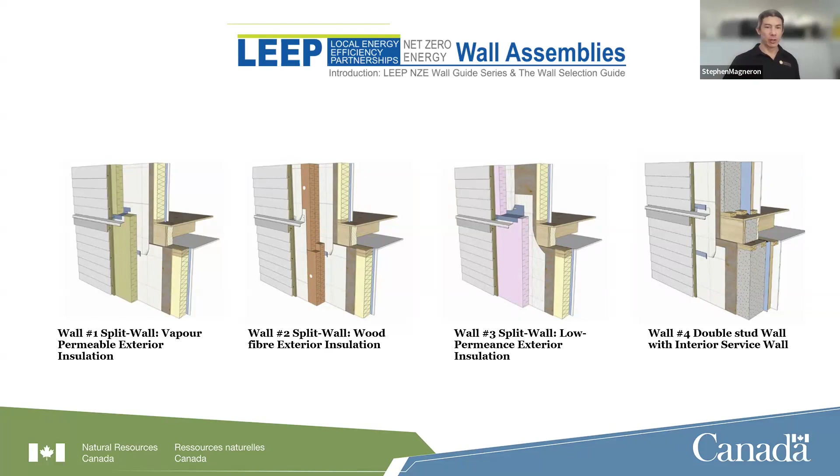So coming up with details that will limit that risk is what the wall guides are all about. The Larsen Truss is one option that will be discussed in this particular case study.

The original Larsen Truss was developed by John Larsen in Edmonton, Alberta. It was in the 80s, and he developed it as a way to combat the increased labor or technical side of things with respect to double stud wall. I believe the story he told Martin Holladay from Green Building Advisor when interviewed was that there was a project in Jasper, and the framers were struggling in this remote area to do the double stud wall.

So he came up with this method of getting the framers to essentially build the house like they normally would, nice and simple. And then he would come in as a subtrade to add the poly as the vapor barrier and air barrier, and then add insulation using this method of ripping down a 2x4 to create basically 2x2s, and then creating this outrigger or ladder on the exterior of the wall to add insulation, then sheathing, then siding. It was a very effective way of creating a great air barrier and also adding a meaningful amount of insulation to the outside. You can see the image there.

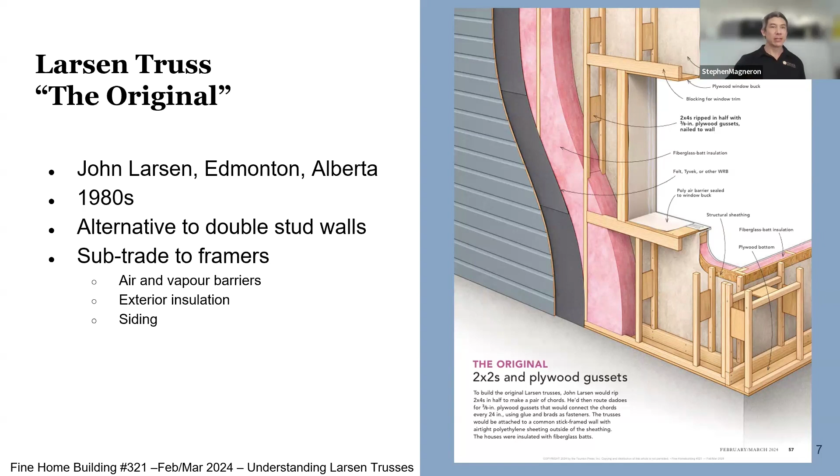That's from a Fine Home Building magazine issue discussing the original Larsen Truss. Since then, Fine Home Building, Green Home Building Advisors, and a lot of publications have covered the Larsen Truss. Here's another one from 2009, where the key point is that an effective R value of 40 can be achieved, which, if you're familiar with Dr. Joe Lstiburek's from Building Science Corporation's perfect wall and typical R values, R40 is appropriate for most climates, and certainly in a cold climate. So achieving that with the Larsen Truss is easy, both in new construction and for retrofits.

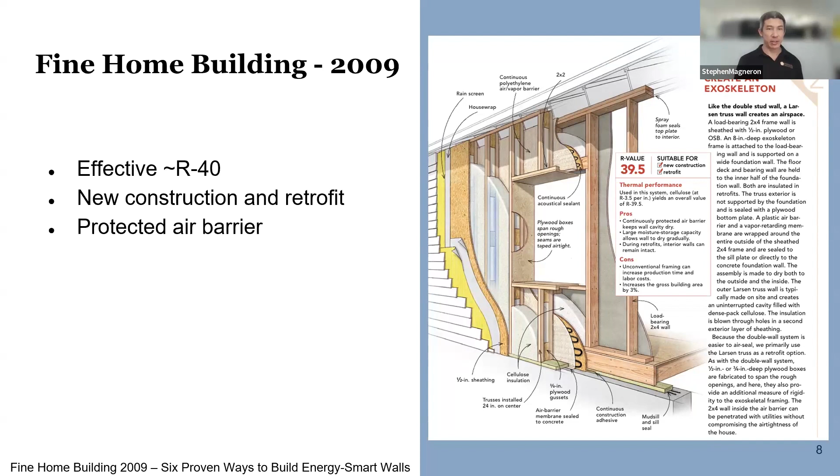The beauty with this is that the air barrier is protected when it's in the middle of the wall. Another check: the interior walls in a retrofit can remain untouched, and we'll see that in one of the case studies. There could be high labor costs, but that needs to be weighed with any strategy. And there could be increases in the gross building area lot line.

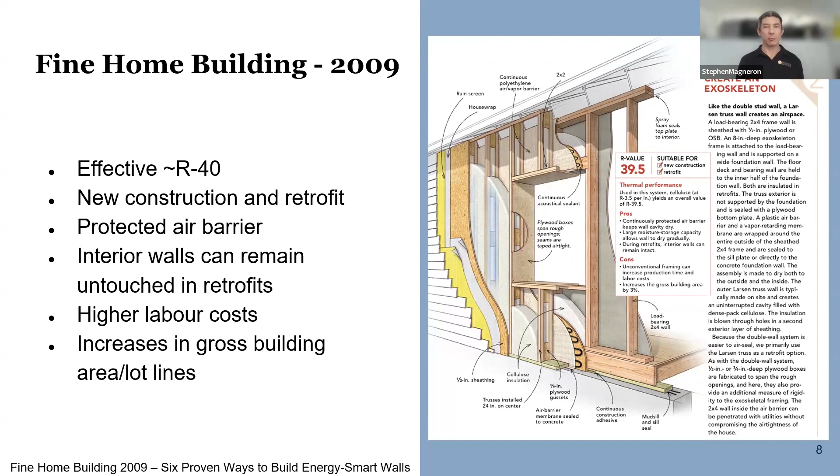So this was a great strategy, and this particular article was '6 Proven Ways to Build Energy-Smart Walls.' The Larsen Truss got featured in that.

In 2013, the Cold Climate Housing Research in Alaska also conducted studies on the use of Larsen trusses for both new construction and renovations. This research paper confirmed that superinsulated, vapor permeable, or vapor open wall design is appropriate for a cold climate.

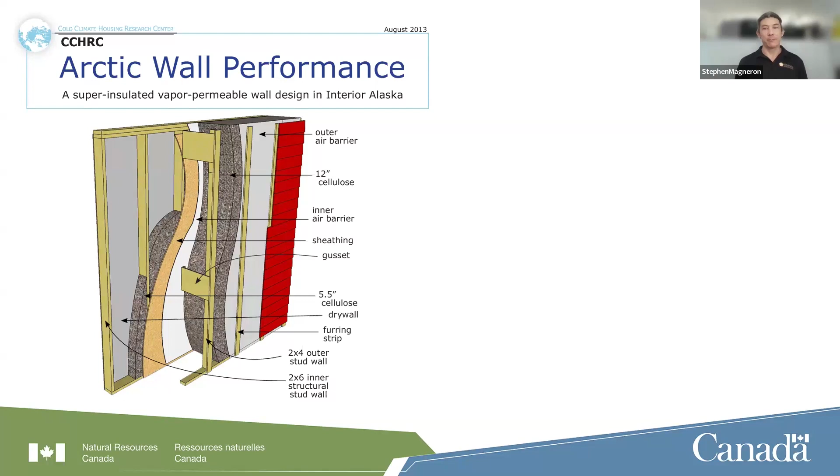The key attributes they found were the great air tightness of this particular project, made easier to achieve when the primary air barrier was located in the middle of the assembly, protected from both the elements and the occupants. The load-bearing structural wall then becomes essentially a service cavity with no vapor retarder on the inside or special consideration with respect to air tightness. This made it easier for the subtrades involved to not have to think about air tightness unless something actually goes through that primary air barrier layer.

They also determined that a class 1 vapor retarder is not necessary in an assembly detail like this, because the vapor permeability provides greater drying potential for the wall throughout the year, since there's drying potential on both sides.

Super interesting: the use of cellulose in this particular study also made the wall safer, because cellulose is able to store moisture and buffer it, so that if moisture gets in, it's able to redistribute. And because there's great drying potential, there's no risk of moisture damage or a big accumulation of moisture or the development of mold.

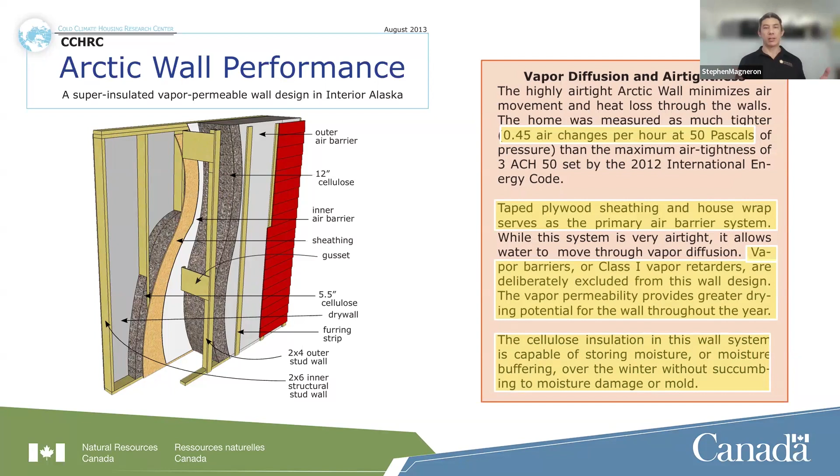Interestingly, the NRCan 'Keeping the Heat In' publication, which was first released in 2004 and is currently available online—these screenshots are from the online version—in section 7, insulating walls, insulating, renovating, and building additions.

So this is more for homeowners or renovators who want to improve their buildings, add insulation, and make homes more airtight. We see that a Larsen Truss is highlighted as an alternative method of doing this deep energy retrofit. It's a technique not only for renovators, but also DIYers.

And the publication also has really great points to think about, like adding significant amounts of insulation. The insulation only ends up being about 15 to 20% of the total cost. The rest is additional materials and labor.

You have to think about details like window and door bucks and other penetrations for services. Extend past the walls to cover the headers—so instead of just attaching to the walls itself, you extend above and below so that you cover those headers, which are sticking points for air tightness, adding a good amount of insulation in most cases, and the ability to install a new air barrier.

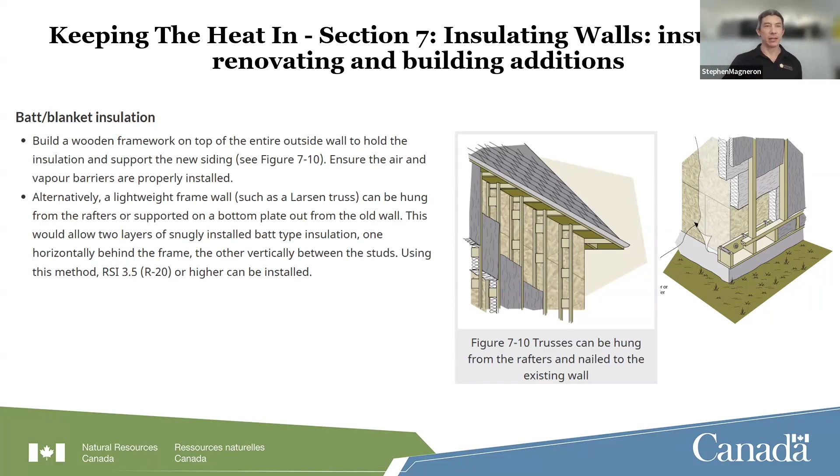Speaking of modified Larsen Truss, Fine Home Building came up with a more recent article understanding Larsen Trusses and the different styles of methods of essentially doing a Larsen Truss, but in a different way. So that's what we're calling the modified Larsen Truss.

Here's one of them, a very popular one using I-joists to simplify the construction of the Larsen Truss, by leveraging a product that can achieve the same goal of adding a thick layer of insulation to the exterior of the building. The I-joists come in certain depths to make it easier—whether it's 9-inch, 12-inch, 14, 16-inch, whatever depth you need, it comes already pre-cut, pre-assembled, basically.

So it's leveraging that idea. Those in the passive house world have already done thermal analysis to suggest that the OSB web of an I-joist doesn't represent much of a thermal bridge at all. It's not like a wood stud that goes all the way through, 1.5 inches wide. The minimal thermal bridging from that OSB doesn't really factor in, so we can almost say the Larsen Truss is a continuous amount of insulation.

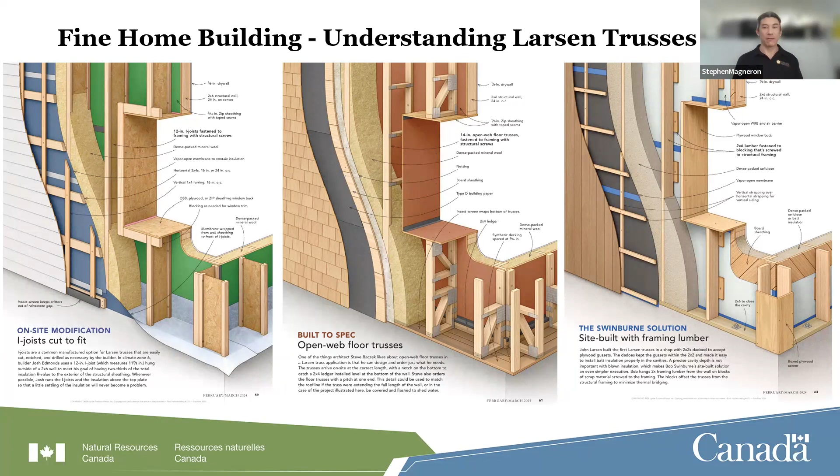And then we have, in this particular article, what they call the Swinburne solution. It's an example of a site-built option that essentially represents any other method to achieve the same Larsen Truss characteristics, and it can differ greatly depending on the specifics of the project.

But I want you to remember that the Larsen Truss is only one part of the deep energy retrofit. It's dealing with the above grade walls and headers. One must also consider all the other components of the thermal enclosure with respect to a deep energy retrofit - the below grade walls and slab, the roof, windows, air barrier, ventilation - all that needs to be taken care of.

I really like this image from River Architects. They hand drew this to show the cross section of their retrofit, pointing out the Larsen Truss. As you see, it's only one part of the big picture of that particular project in Cold Spring, New York, which is now their office, actually.

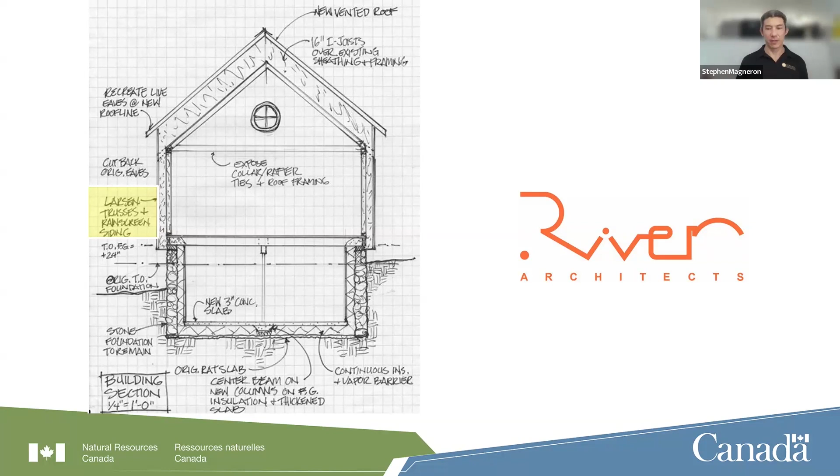So that's a quick history on the Larsen Truss and how we've moved from the 80s to now with different methods of achieving essentially the same goal.

And so we start with the first case study. This is a project in Sainte-Agathe in Quebec, near Montreal. It started its life as a barn. We aren't sure when it was originally built, but the walls above grade used a construction method called pièce sur pièce, which is post and plank, very common in Quebec from the late 18th century up till the early 20th century. This method usually included a 6x6 square post spaced around 4 to 6 feet apart with 3-inch thick pine or spruce boards as sheathing - very heavy duty, used a lot of local lumber, and very popular.

Even in Montreal, with Felipe at Retrofit Construction, we had a project where this method of construction was found in his own project as well.

Riverstone was assumed to have once clad this building, based on the extension of the rubble foundation of about 8 inches. The barn was converted in the 60s, around 1968 we reckon, with siding rather than stone. Who knows what happened - perhaps the stone was repurposed or had deteriorated, so siding was installed, as you can see in that picture of the pre-retrofit house. Interior insulation was also added with the 2x6 wall.

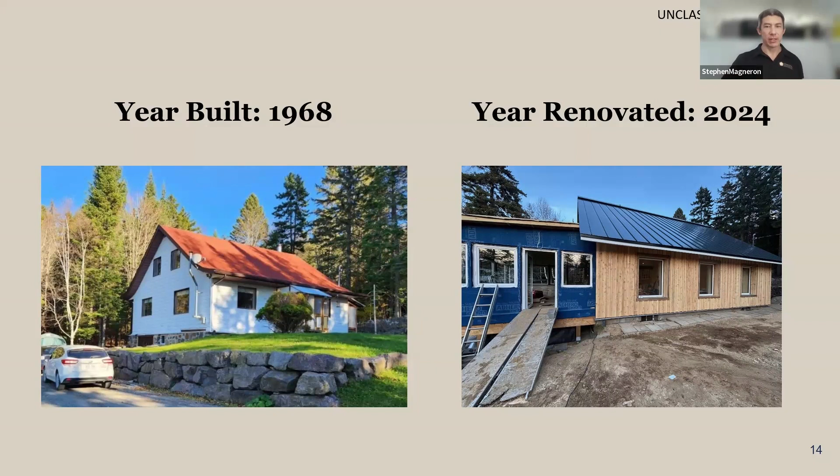So a perfect opportunity to set the project up for success. Here are the pre and post retrofit reports provided as part of the CHBA Net Zero Home Labeling Program. The rating of the house was originally 179 gigajoules per year, and the post-retrofit results reduced that down to 46 gigajoules per year.

The typical new house you can see there was originally at 89 gigajoules per year. That's the reference house, or a typical new house, with current code characteristics applied to it, whether it's insulation, windows, air tightness, all those things. So it's 89 gigajoules per year.

You can see there's a slight difference in the typical new house between the pre and post retrofit. That's really because of the chainsaw retrofit approach, where the volume got a little bit bigger and slightly increased surface area, because now the attics are conditioned space with the chainsaw retrofit happening. So the increased volume and surface area increased the energy consumption of the typical new house.

So chainsaw retrofit, just to describe that — actually, I think I'll be describing that in the next slide, so I'll hold on to that and keep you waiting with that description if you're not aware of it.

With respect to end use energy, when you get an EnerGuide rating label, it tells you the breakdown of where the energy is being used across major appliances or usage: space heating, space cooling, water heating, ventilation, lights and appliances, and other electrical. You can see in this particular case that space heating was 75% of the energy consumption pre-retrofit.

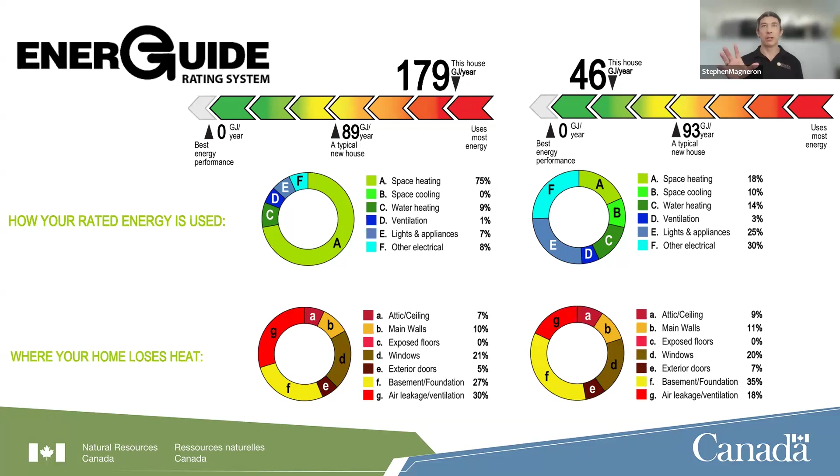When we look at the heat loss, another output of the EnerGuide rating system is an identification of where the heat is being lost from the thermal enclosure during the winter. It's broken up based on the location, and you can see here that air leakage is the highest amount of heat loss.

In the pre-retrofit, and then in the post-retrofit, it ends up being one of the smaller parts of it. We'll be discussing that throughout the course of this presentation.

But the ratios of heat loss between the pre and post are relatively the same, with the exception of air tightness, because everything was done to this house — the walls, the roof, the basement walls, the air tightness — everything was increased with respect to insulation. So the relative ratio dropped at about the same rate.

So here are some results, some key metrics from the outputs. We've got the pre-retrofit effective R-value of the walls, and we've got the total EnerGuide rating in gigajoules per year. If you're not familiar with that rating, a gigajoule is a unit of energy that is convertible from either kilowatt hours for electricity or cubic meters of natural gas or liters of propane.

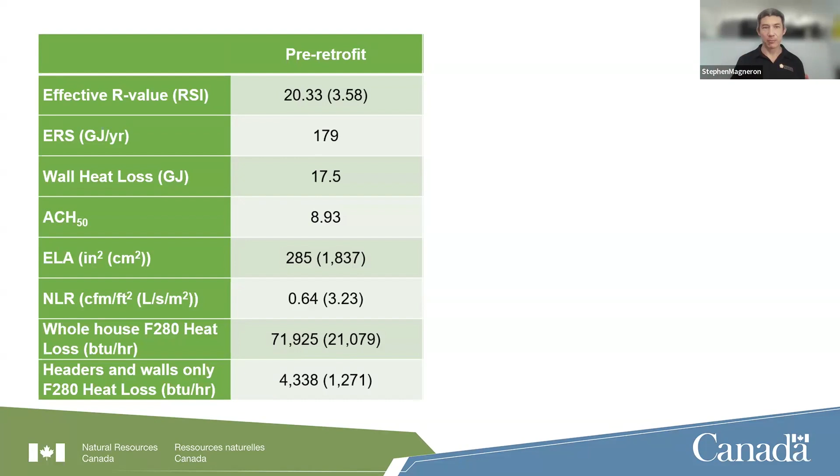So when we go to the post retrofit, now we see the improvements that have happened. We have increased the effective R value of the wall from R20 to almost R50. We're at R47-ish, which is a difference of 133%. Amazing. Then we've got reductions, reducing the total ERS gigajoule per year down to 46. The wall heat loss gets reduced by 73%.

The ACH, amazing result, 8.93 down to 0.74 at final. Huge improvements there. The ELA drops by 93% as well as the NLR. So huge reductions there. When we look at the whole house F280, we've gone from 72,000 BTUs to below 15,000 BTUs. And that heat loss is what we use to size the heating system. So instead of having a huge furnace, now we can really get by with a very minimally sized cold climate air source heat pump. So amazing reductions there.

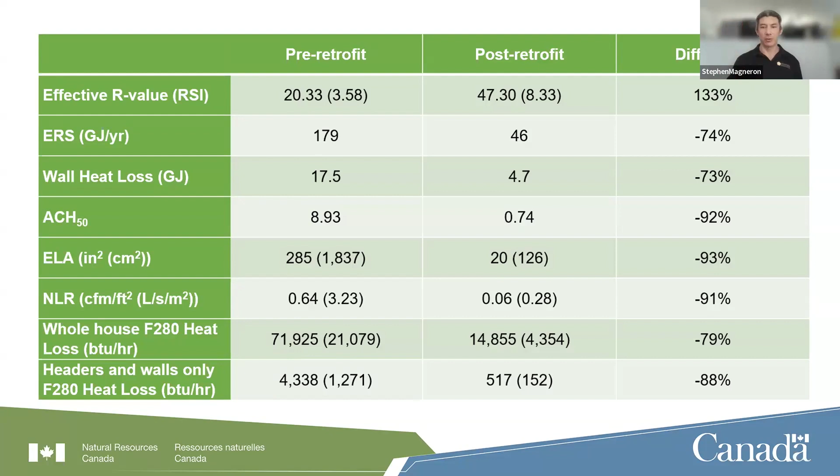And of that, the contribution to the F280 heat loss is also reduced significantly with respect to the headers and walls only. So that's a nice little snapshot summary of all the details and results from that.

The building is then wrapped with an airtight membrane, tested for air tightness, and then insulation is added to the exterior of the walls and the roof. The overhangs are reframed because we do want good overhangs for moisture deflection. New siding and roofing gets installed, and that's it. That's essentially the chainsaw retrofit.

If windows are to be reused, then it might be a good idea to uninstall the windows and then reinstall them and make sure that there's good flashing details at that time, so that we don't compromise the new Larsen Truss that is installed on the exterior, and we take the opportunity to make sure that the project will not be at risk of any moisture that gets into the wall system at all through windows that will eventually likely leak.

So it's a very effective way to achieve great air tightness and add a meaningful amount of insulation to the thermal enclosure. And so it's a great opportunity to use the Larsen Truss approach, although it's not the only approach that can be taken.

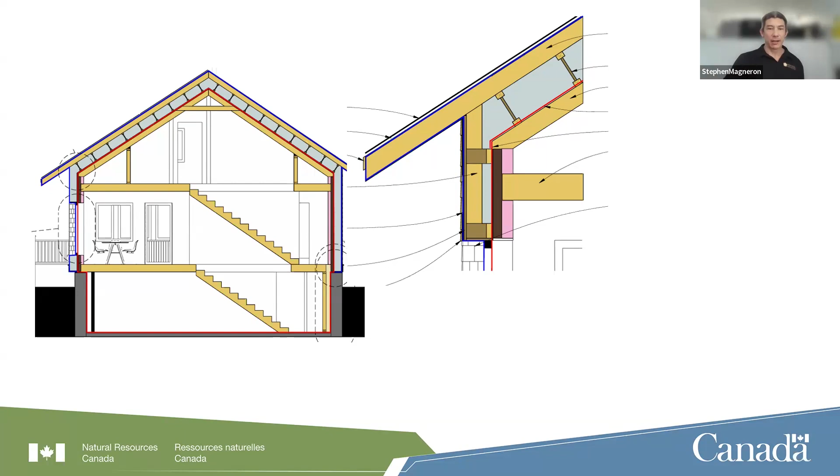Here is a detail of the wall to foundation that shows the depth of the original foundation that originally carried the riverstone cladding, but now bears the modified Larsen Truss. The top of the foundation needed some repairs, which made it the perfect substrate for the exterior 2x4 of the modified Larsen Truss. Instead of having the gussets cantilever out, there was no need, because that 2x4 was held in place by the foundation. Because of that, we developed the strategy of an 8-inch Larsen Truss, so there's a nice amount of continuous insulation and then the exterior 2x4. It's a great way of optimizing the solution based on the variations of the particular project.

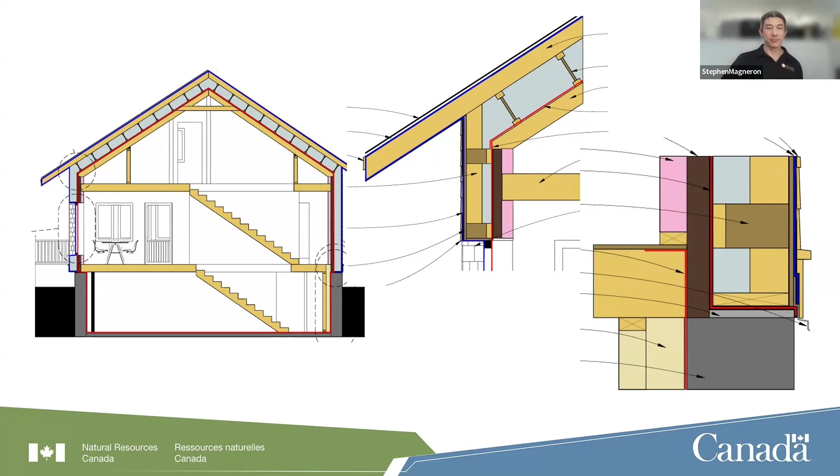Here's a great image showing the 3-inch solid wood planks of the pièce-sur-pièce, or post and plank wall, and the forming repair needed at the top of the original rubble foundation, as well as the development of the plywood bucks framed for the window. The plywood bucks were originally installed deeper than 8 inches in case of modifications afterward with respect to the Larsen Truss. Once the wall was installed, the bucks were trimmed to the right depth, which made it a simpler situation for this particular project.

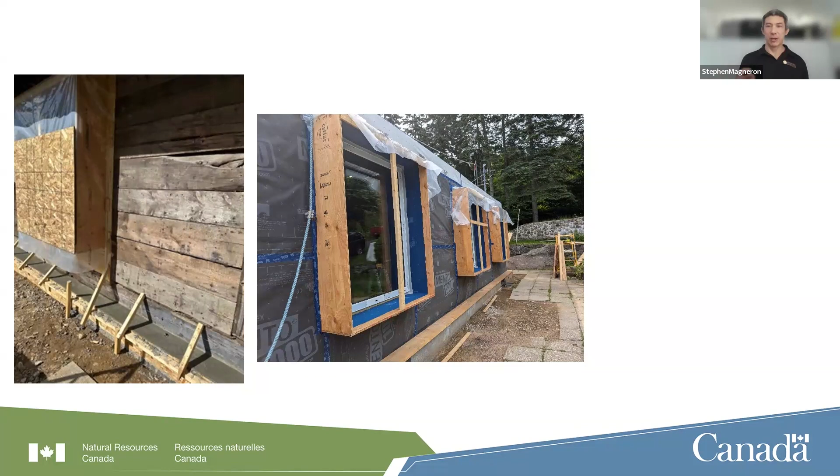It allowed the primary air barrier to be installed to the window bucks, and the interior of the window bucks to be properly flashed and addressed from a water and air tightness perspective. However, during our mid-construction air tightness test, because of that extension of the window bucks, we saw a little bit of air leakage happening in the corners, since the plywood bucks continued out and weren't trimmed. There was actually some discontinuity there, which was minimal in the grand scheme of things.

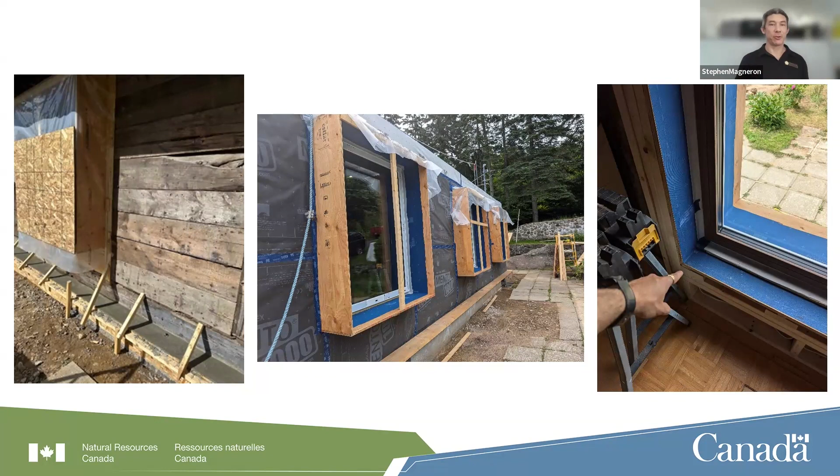Here is the primary air barrier once it was completed, and the only thing missing is a red ribbon on top, because you can see how neat and tidy it is. It's almost like a wrapped Christmas present, and in this case the windows and doors were also installed at that time, so scheduling was super important to make sure windows and doors were available early in the construction process, so that an early mid-construction air tightness test could be done as soon as the primary air barrier was complete.

Look how clean the wall to roof corner junction is when a chainsaw retrofit approach is taken. If you can imagine doing it all from the inside, that would be a really tricky area to approach. But with an exterior approach like this, chainsaw retrofit with Larsen Truss, that detail is really simplified and made much easier to achieve.

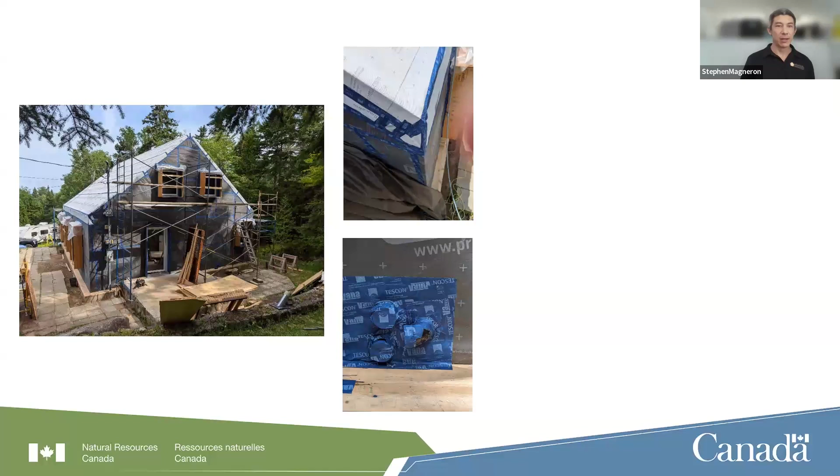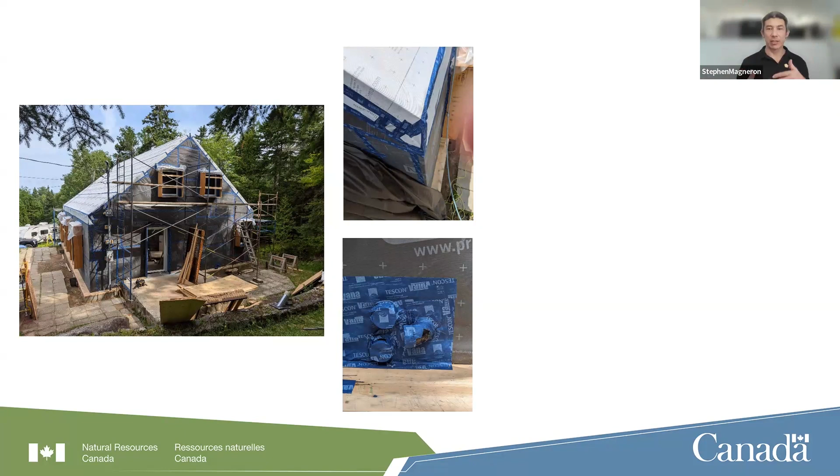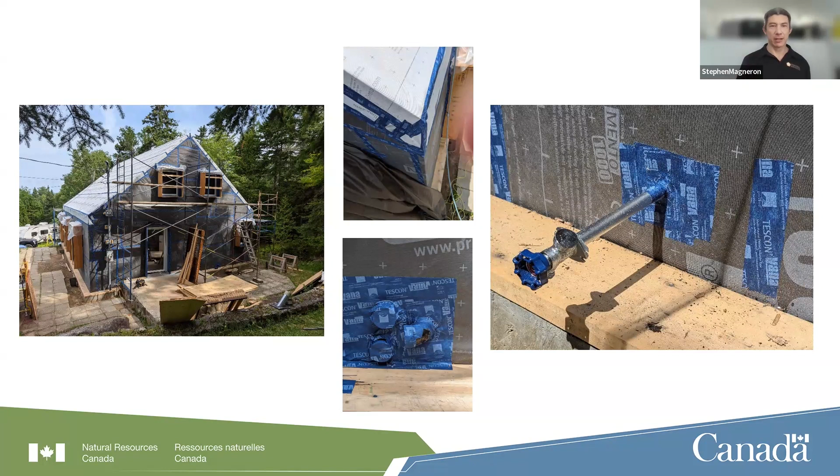As far as penetrations that go through the primary air barrier, the one hole for one penetration methodology is used, which really simplifies the process because the penetration is accessible from the outside. We don't have to work above our heads in header spaces that are tight, cramped, and not easy to access all the way around. With the exterior approach, it really makes it easy to get a nice seal in those locations. Even for hose bibs, roughing them in so they achieve the appropriate depth and are sealed appropriately makes for a great air seal.

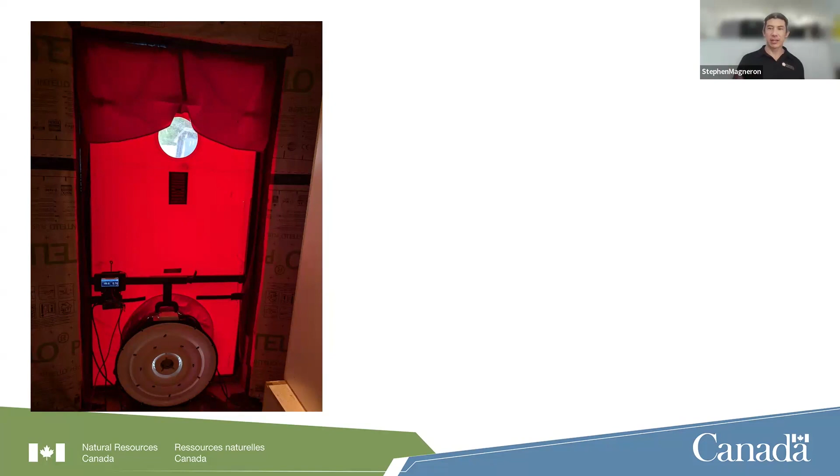So we don't have a red ribbon, but we do have the red door of truth, also known as the blower door. Remember, the pre-retrofit air tightness result was 8.93 ACH with an ELA of 285 square inches and 0.64 CFM. At the first mid-construction test, we achieved 0.73 ACH, which was an amazing result. This is mid-construction, first time out, knocked it out of the park.

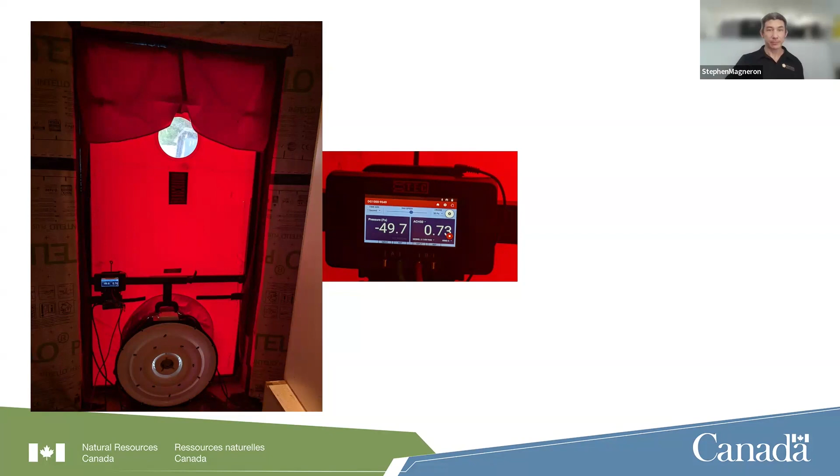We also attempted to do a pressurization test. For those of you aware of passive house, they do air tightness testing in both directions - depressurization, sucking air out of the house, and pressurization, to see what the results are there. But the test was quickly aborted when we realized the primary air barrier on the roof wasn't secured enough, and it was starting to balloon up, with some staples popping. So we aborted that and saved it for next time.

We did do a second mid-construction test once the Larsen Truss was installed, and the redundant secondary exterior air barrier, the WRB, was also installed. Those familiar with blower door testing might recognize the D-ring being used in this Minneapolis Model 3 fan, which means it's really tight - the smaller the hole of the fan used to do the air tightness test, the tighter it is.

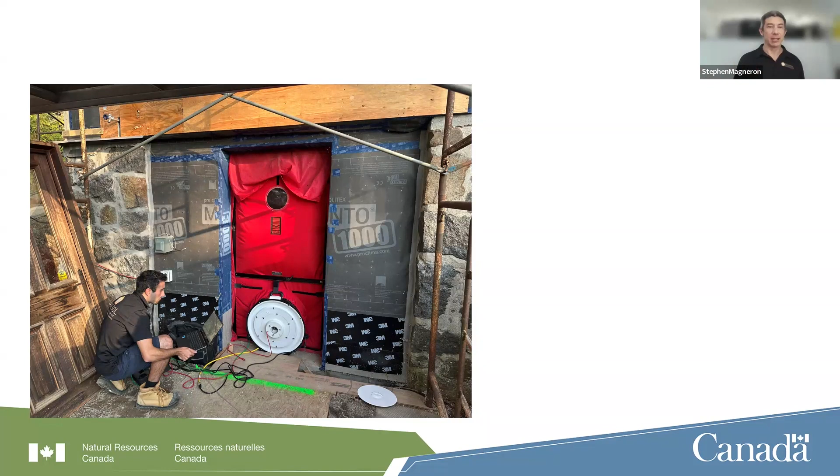Here are the results of the second mid-construction test, and we improved both, and were able to do both a depressurization and pressurization test. Interestingly, the pressurization test in this case was much better, and the average was 0.47 ACH.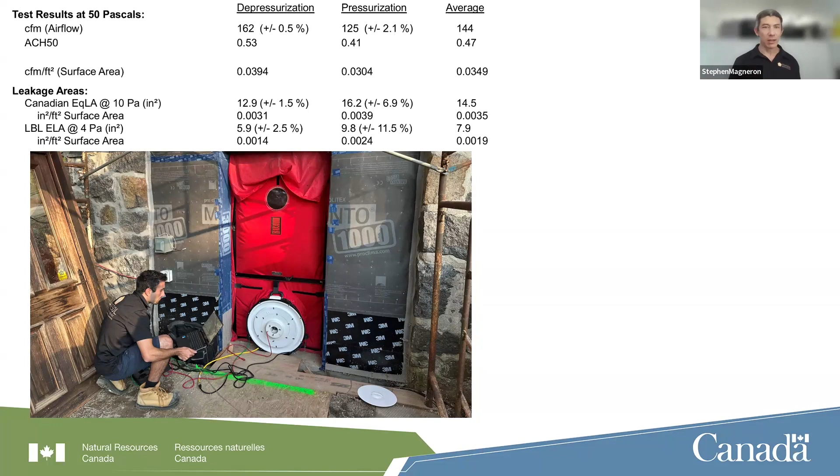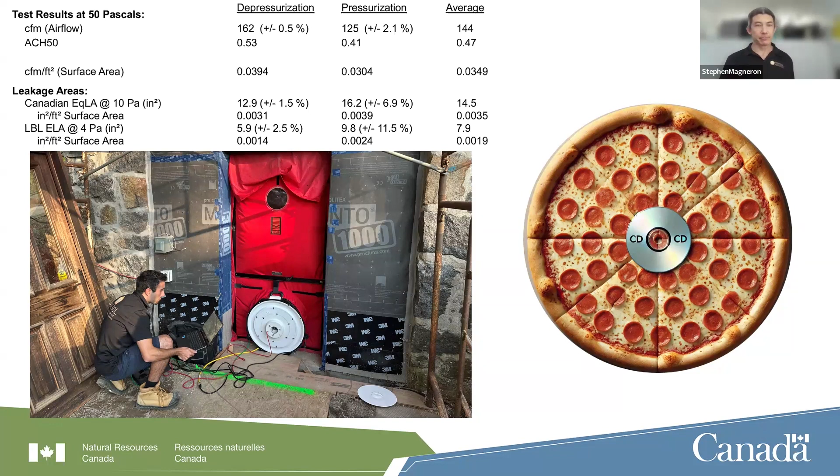But I'll point you to the EqLA, which reduced from even the 20 inches squared in the previous test down to 14.5 for the average of these two tests. But what does that mean? Essentially, the pre-retrofit hole was the size of a 19-inch diameter pizza, whereas post-retrofit, at this particular stage, it was the equivalent of a CD or DVD, for those who remember what those are. So a significant reduction in the hole.

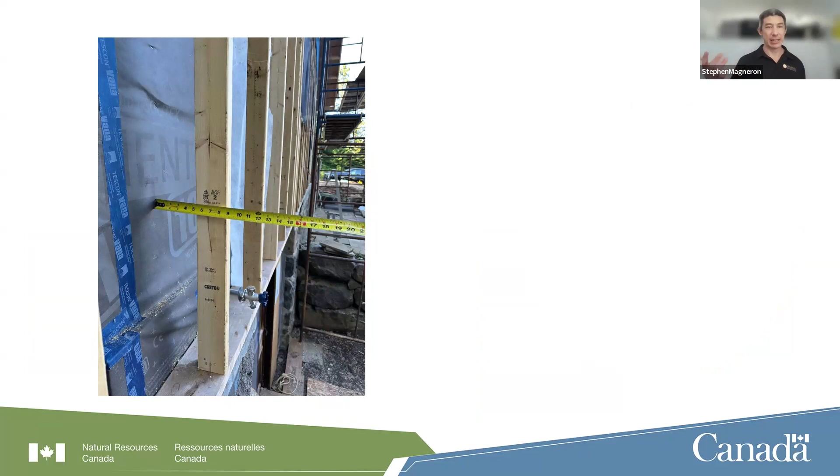Here's the construction of this modified Larsen Truss. The beauty of it is that there is continuous insulation of cellulose in this particular case, and then the wall on the outside of that.

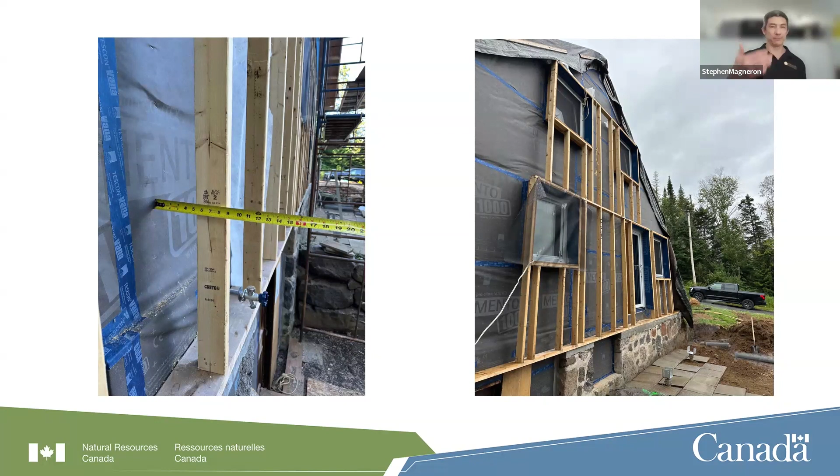Here it goes up the gable end wall, and the gussets of a typical Larsen Truss probably aren't fully required because it's such a small amount of wall area in the grand scheme of things. The window bucks are essentially keeping that wall from wind effects and keeping it spaced appropriately from the existing wall.

On the interior side, the original 2x6s were not meant to be touched. However, in the process of resizing all the windows and moving the doors, there were too many areas of damage, and finally the decision was made to update all of the interior wall structure and re-insulate with R22 mineral wool, with a vapor variable smart membrane on the interior, which also served as a redundant air barrier - perhaps a little unnecessary in the grand scheme of things.

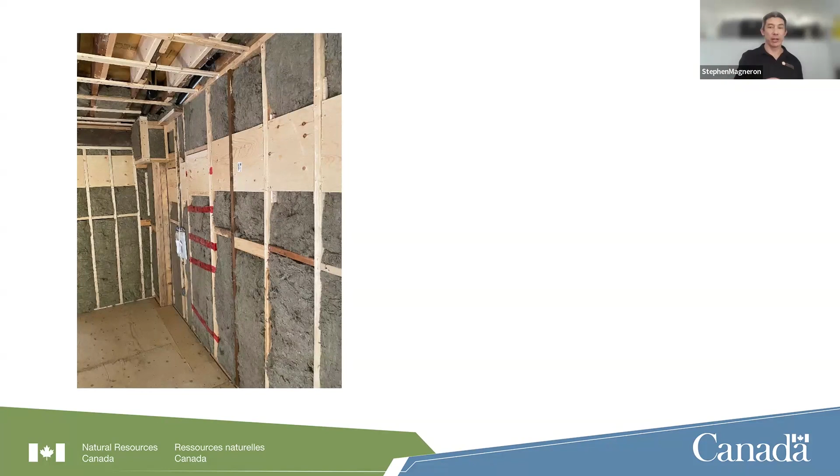Considering that the mid-construction air tightness test was so amazing, in hindsight, installing the Intello perhaps on the exterior as the primary air barrier may have provided the appropriate air control and vapor control, and could have allowed the interior membrane and strapping you see in this image to be omitted to save costs. So that's one of those learning opportunities for this particular project.

It's also possible it may have been more cost effective to make the Larsen Truss deeper and actually have it cantilever out to achieve the same effective R-value, rather than doing anything to the interior other than a little bit of restructuring. So insulation may not have been required, the air tightness membrane may not have been required, and that could have perhaps saved cost if that analysis had been done.

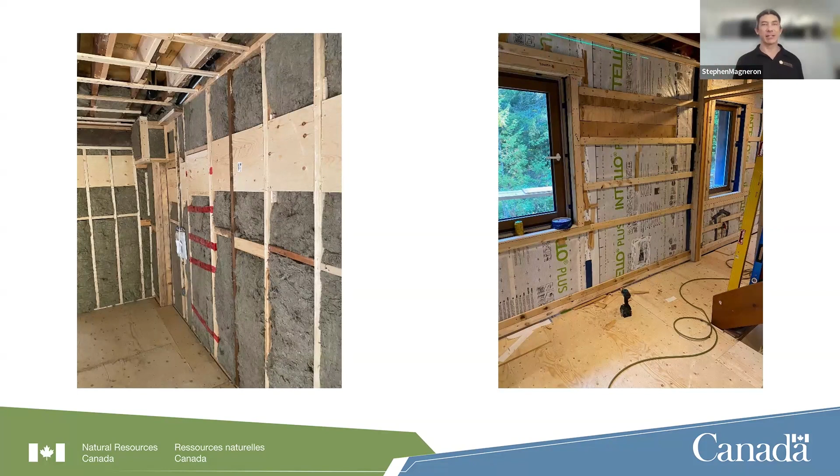The issue with retrofits is that you have to make decisions on the fly in certain circumstances when problems arise, and that analysis is a difficult one to do every single time. So, food for thought for the next project.

Speaking of costs, Felipe did provide a rough breakdown on the costs associated with the Larsen Truss, and also comparisons with other insulation methods for the exterior insulation only in this particular analysis. This analysis does not include the interior wall with the R22 and Intello and strapping. It does include the window bucks and the brick ledge repointing and capping, because these two are essentially constant for all four options of the analysis for the exterior component of this retrofit. Where they differed was the exterior insulation framing, and if applicable, the labor associated with it.

Then I also divided the costs by the total wall area and header area for a cost per square foot.

The first option was 8 inches of mineral wool. This is not associated with the Larsen Truss; instead it's 8 inches of semi-rigid mineral wool attached with long screws and strapping. At the time of this cost exercise, this product was prohibitively expensive compared to the other options. The labor estimate may have been conservative, because while the product is rather dense, it's still only semi-rigid. So ensuring the strapping for the siding is straight and true can be time consuming, requiring a string line and the strapping to be backed in or out to be perfectly in line.

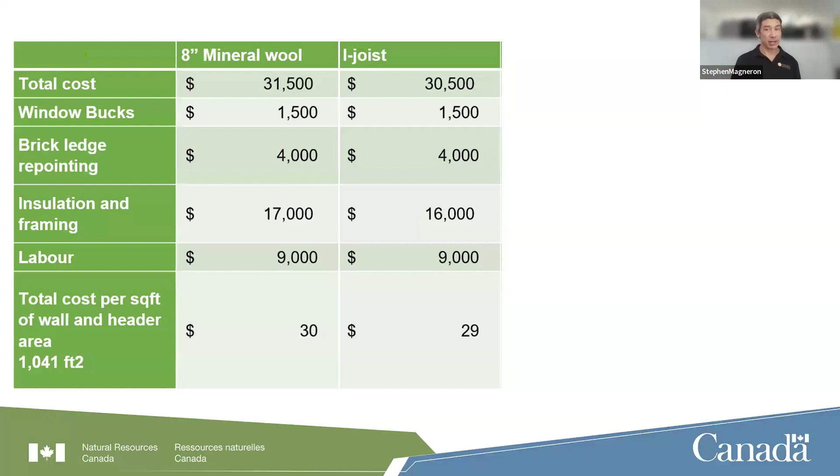So the next option that Felipe analyzed was the I-joist. In this particular case, it seemed that the I-joists themselves were an expensive component, which made this option a bit more cost prohibitive.

Then there's the Larsen Truss, or perhaps we'll call it the Swinburne Larsen Truss option, that was more affordable. Cellulose in this case is a very affordable product, and the estimate for materials and labor to install the blocks, gussets and exterior 2x4s combined to be lower than the I-joist option that also used cellulose. Considering that the brick ledge repointing and capping was required and it was the perfect depth, it made the most sense to eliminate the blocks and gussets and just build the exterior 2x4 resting on that foundation wall. It would have been interesting to include the interior wall costs, as I mentioned before, with the 2x6 insulation, Intello and strapping - that would have been a constant across these options.

Then I created a fifth option that reduced the interior wall to a 2x4, eliminated the insulation, Intello and strapping, but increased the depth of the modified Larsen Truss to achieve the same effective R-value, to see what the cost difference would have been in that situation. So perhaps for the next project, Felipe.

As far as scheduling goes, this is the brief outline Felipe provided. There was wall demolition that took a week, resizing the windows and window bucks, and restructuring the walls where they were damaged - that took a couple of weeks. Repairing and capping the stone foundation took about a week. Window installation, about a week. Then the roof - now we're adding in a bit of that chainsaw retrofit component - so the roof work and everything surrounding that took about 3 weeks.

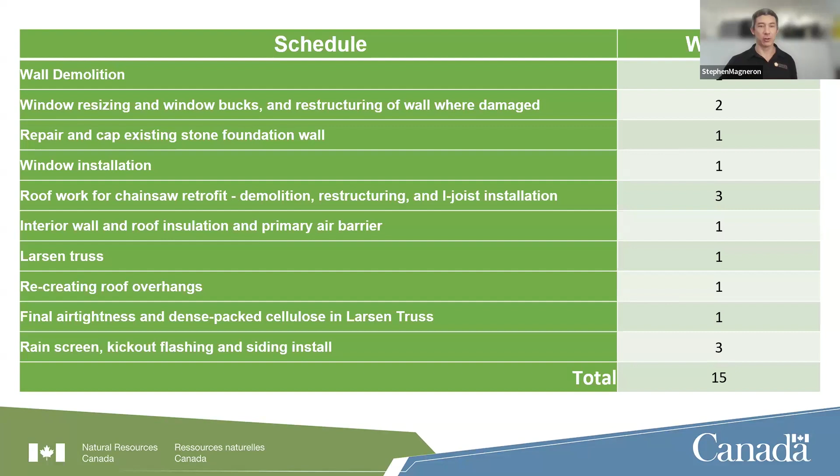We did a carbon analysis on this using the Material Carbon Emissions Estimator, or MCE squared, from NRCan, including the interior walls - so the wall only in this particular case. The first option you see is as built, with the mineral wool batts on the interior and cellulose on the outside within the modified Larsen Truss. This analysis was really just looking at the insulation material, to hyper focus on that part of the construction.

The second option you see here is if we use mineral wool both on the interior and on the exterior. You can see that while mineral wool is an excellent product thermally, and for its hydrophobic characteristics - it drains - it is fairly high in embodied carbon, as we can see in this analysis.

The third option is if we were to use 100% spray foam using the new HFO blowing agent, which is relatively low in global warming potential, but as you can see here, it still has a high upfront cost with respect to carbon. The fourth option here is when we exchange the interior mineral batts for cellulose instead.

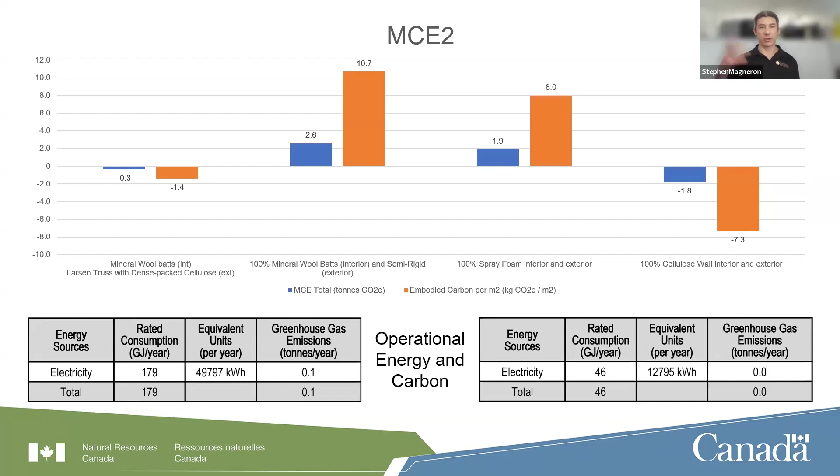Through the integrated design process, a roadmap was developed and a phased retrofit was set in place. So the post-retrofit evaluation that is part of this presentation is but a stepping stone to the final plan. Keep that in mind when you look at the results we present here. We are mostly focusing on that Larsen Truss aspect of it.

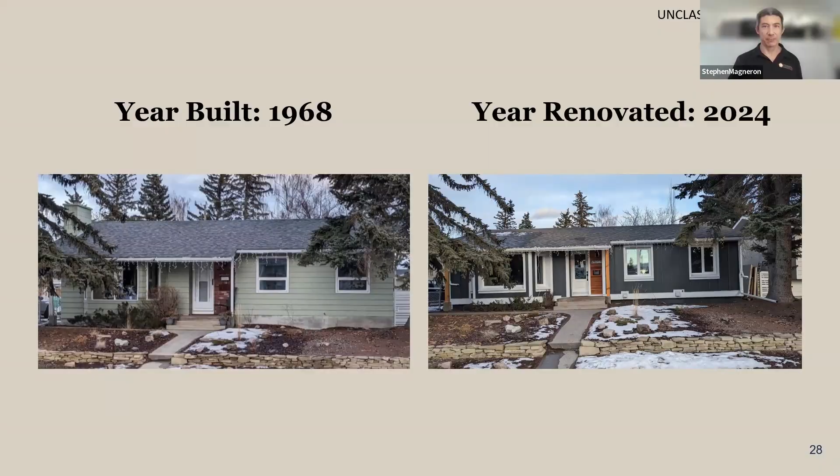So here it is in the completion of phase 1, let's call it, of the retrofit that was completed last year. With respect to the results, here are the reductions pre-retrofit compared to post-retrofit: 119 gigajoules down to 68 gigajoules. Just to explain that a little bit more, the upgrades included in this phase 1 were the Larsen Truss.

So, above grade walls, the crawl space had some insulation added to it and some air tightness details. The windows were upgraded with nice triple glazed windows with low U value, low SHGC from Innotech windows. The air leakage was also reduced.

We'll go into that a little bit more. Ventilation was added, and for domestic hot water, a heat pump water heater was introduced, but the existing gas furnace remained and a heat pump wasn't added to it. If it was, then in phase 2, assuming that a cold climate air source heat pump would be installed, adding insulation and air tightness would be achieved as well.

There's the potential that 68 gigajoules per year could be reduced down to about 52. The biggest challenge, the biggest change in energy consumption here, when we look at the end use energy, is the water heating. Thanks to that hybrid heat pump water heater, you can see it drops from 22% of the end use energy all the way down to 5%.

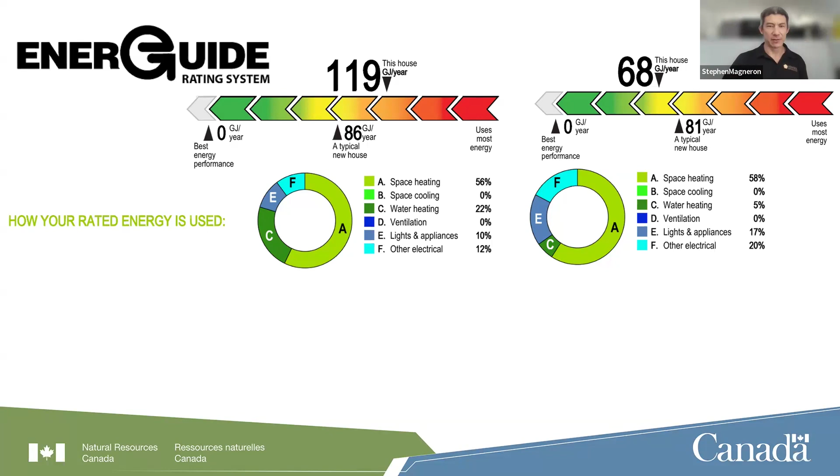Here are the heat loss analysis and the ratio of where the heat was being lost. You can see that the Larsen Truss, made in the main walls, made a significant drop down, but there are other areas that also contributed to that.

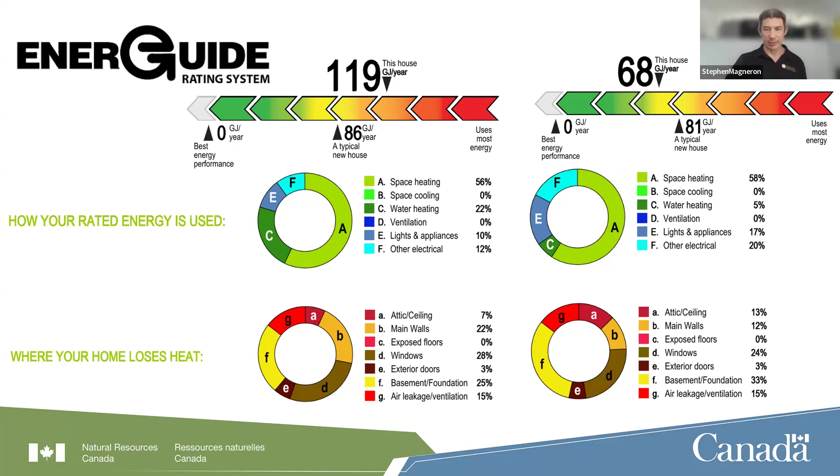Here are the results summary. I won't go into detail about all the specifics in the headings, but we see these results going from an effective R value of 8, and then post-retrofit it actually increases to an effective R38.

The ERS drops from 119 to 68. The operational greenhouse gas emissions goes from 10.8 to 8.1. The amount of heat loss through the walls is significantly reduced, and the ACH is also cut basically in half, as well as the ELA and the NLR.

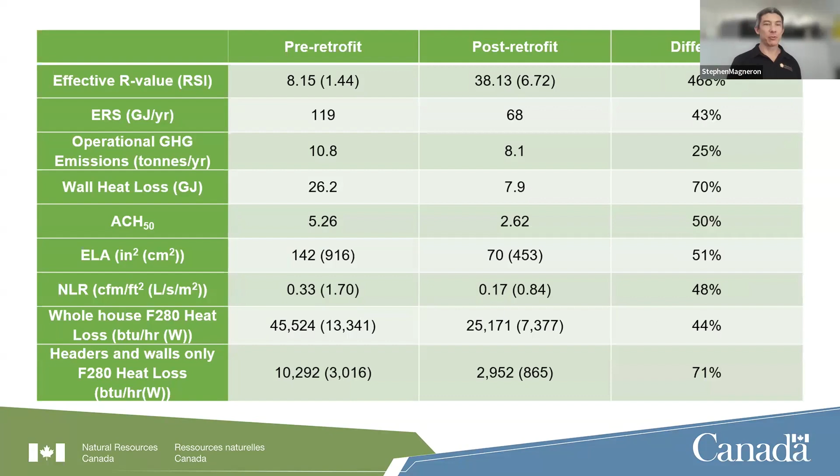When we look at the whole house F280 calculation, it goes from about 46,000 BTUs down to 25,000 BTUs, which is a significant reduction in the size of the heating system required. Of that, the headers and walls only contribution goes from about 10,000 BTUs down to 3,000 BTUs.

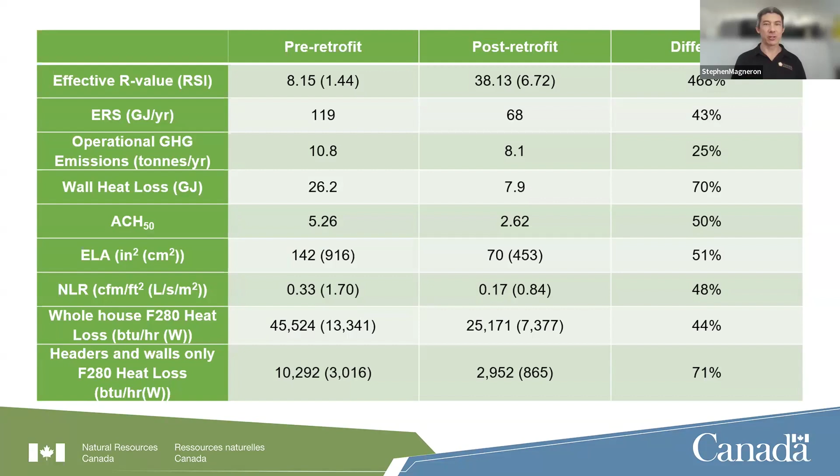Here you see the differences, but I noticed that other than the first one, which is an increase, all the others should be a negative sign. So 43% reduction in the total gigajoules per year, and all the other reductions associated with that. To compare against case study number one, which was a holistic, everything-done, one-and-done approach, this is a phased approach, and in phase one we still achieved significant energy reductions in all of these values. So a huge win on that part.

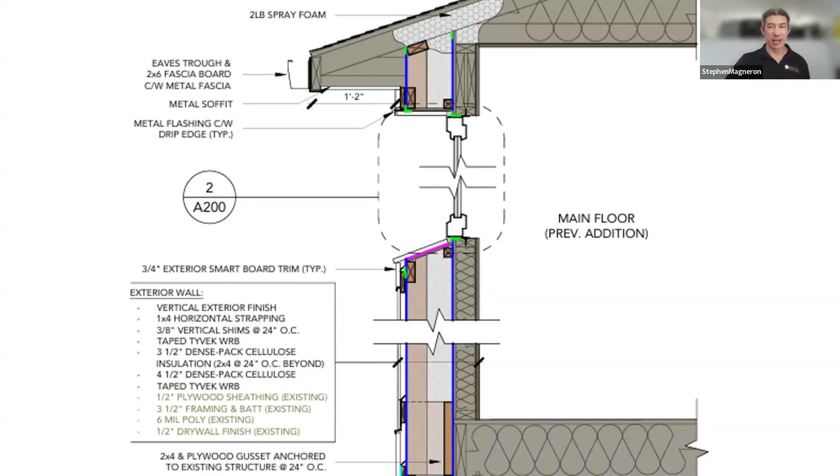I really also like the aggressively sloped sill that not only helps deflect bulk water away from the house for great moisture management, but the white flashing with that angle can also act as a bit of a light shelf, helping reflect diffuse light further into the house, which is a nice little detail.

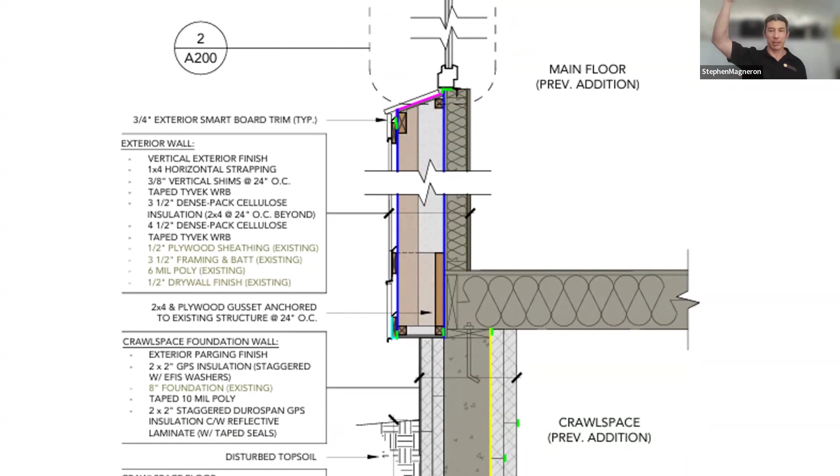At the bottom of the Larsen Truss, you can see it's anchored to the existing wall with one long gusset and blocking, as opposed to gussets all the way up the wall like the original Larsen Truss. This is in combination with the top plate being attached to the existing roof truss, so now we don't have those additional gussets, and the labor and material savings that come with that.

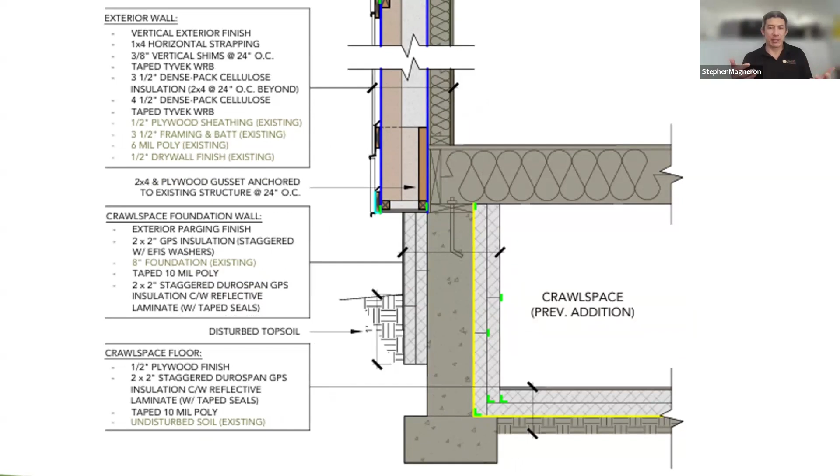Additional foam insulation was added to the foundation wall to provide additional thermal control, and also maybe from an aesthetics perspective to reduce the cantilever of the Larsen Truss.

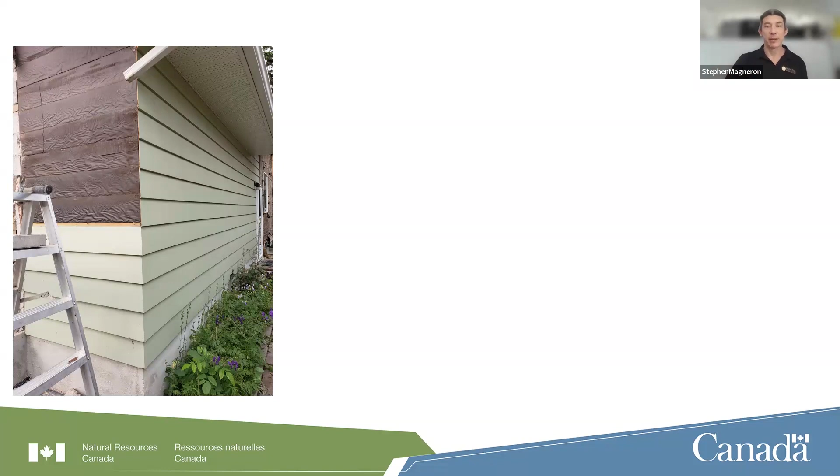The existing plywood was exposed and inspected for damage. I didn't hear of any significant repairs required, so assuming they were able to just carry on, but that's a great reason to get rid of the siding so that the inspection can be done.

The project was fortunate enough to have uniform deep overhangs all the way around. You can see in the gable end that it's just as deep as it is at the wall, which is nice, because oftentimes the gable end typically has a small overhang, which, if you're adding an 8-inch Larsen Truss to it with only a 6-inch overhang, would mean some re-roofing needed at the top. So that's a nice little add-on, or nice feature, that they have with this particular project.

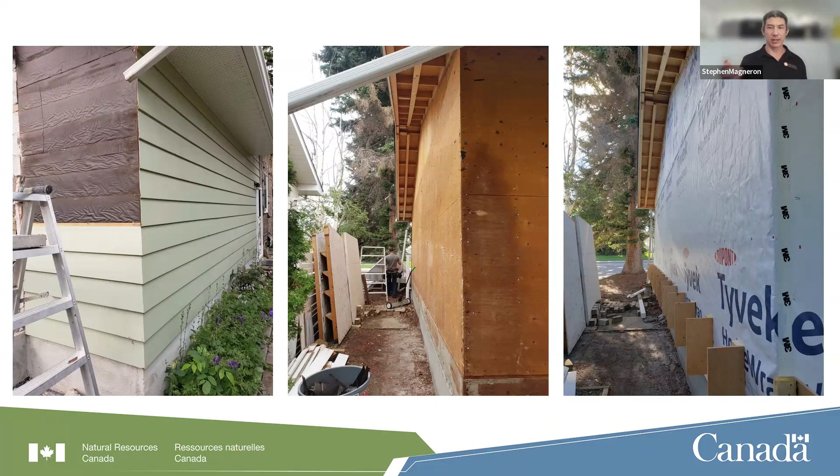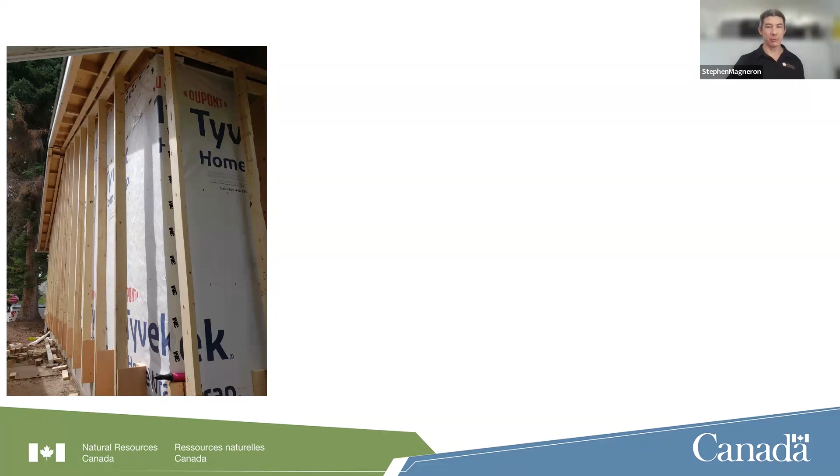The house wrap was added as the primary air barrier to the walls, and you can see here that the blocking has already started with the gussets. Then the 2x4 wall is attached to the gussets and also to a top plate that's on the underside of the roof truss.

Insul web netting is used. It's an extra step in the process, but the insul web is an air permeable membrane for cellulose installation, and it allows the dense packing of the cellulose to be done with air that can move out, so it doesn't give that bowing effect of the membrane that's on the exterior.

Unlike the previous project where there was some bowing and blocks needed to be put in behind the strapping to prevent that bowing, the use of the insul web allowed for the cellulose to be installed without any significant bowing and additional strapping to keep that in check. So I thought that was a nice comparison between the two.

Now it does need to have a weather-resistant barrier put on top of it, so it is an extra step. It's certainly one of those pros and cons things that projects would need to weigh up.

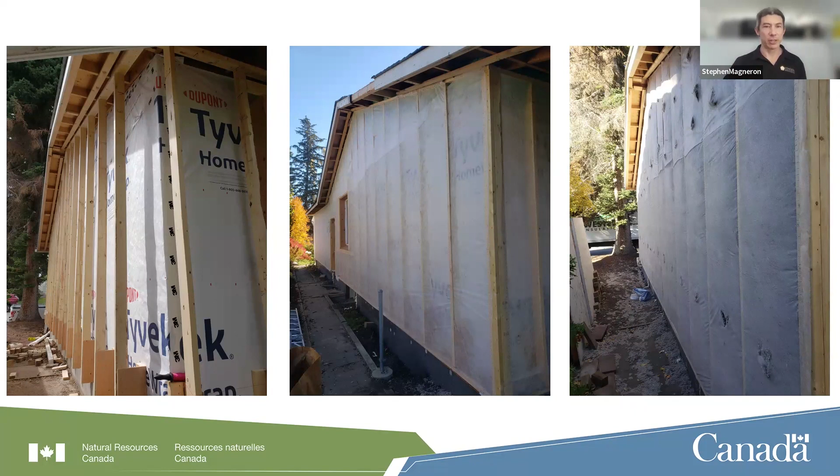Here's another look at the sequence of the Larsen Truss installation, including a window. So we've got the siding and the felt paper removed, then the Tyvek primary air barrier is installed, in this case over the window rough opening, because one of the scheduling issues with this project was the windows didn't show up until later in the project, so they had to work around that.

Then you can also see the spray foam installed at the top of the wall into that roof space, so blocking off the ventilation there, but then carrying on the air barrier strategy to the interior of the attic, and then down the wall on the inside in that particular case.

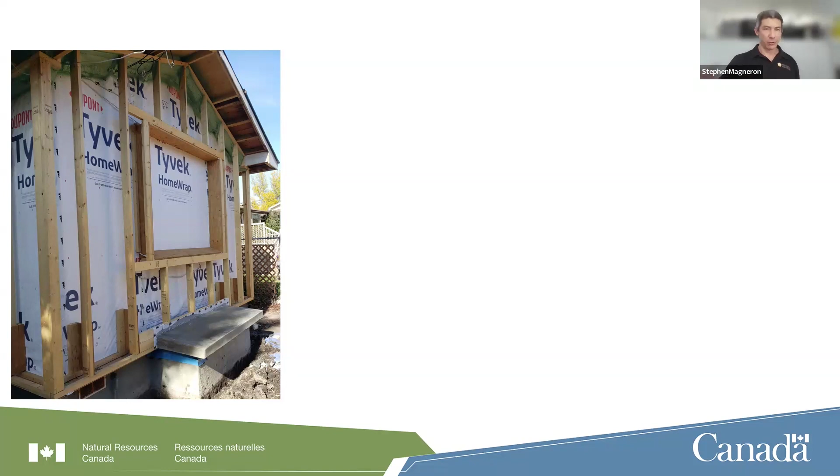The Larsen Truss is framed, the wall, the window buck is framed as well. Then the exterior house wrap is installed after the dense pack cellulose installation with that nice sloped and flashed sill. Then the windows are installed with the horizontal strapping. So a nice little sweet sequence there in one particular location of the house.

You can see here that to promote great drainage, 1/4-inch plywood blocks were installed between the horizontal strapping and the exterior 2x4 of the Larsen trusses to separate the strapping from the siding. So flying battens weren't required, like case study number 1 needed, because of the air permeable insul web. Let me zoom in here.

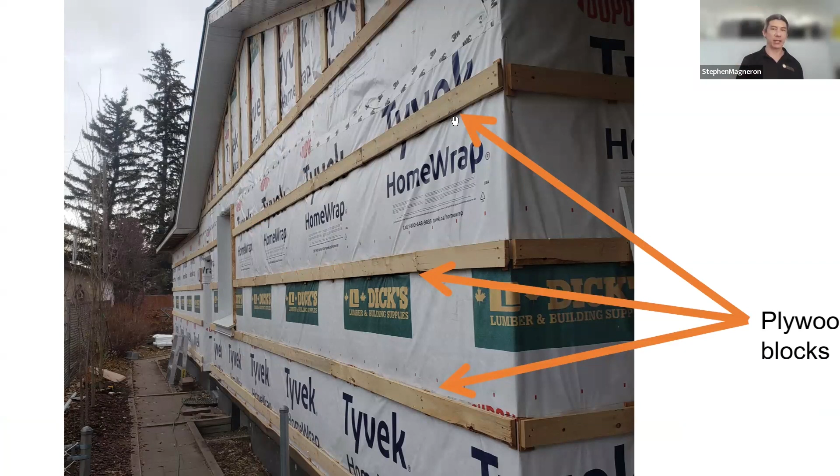So we can get a better look. You can just see that the horizontal strapping is not tight up against the Tyvek, so any bulk moisture that does get in behind will have a drainage path to go down. A nice little touch there, I thought, which was great.

And then the siding goes on, which is a nice vertical board and batten siding that is a Hardie cement board.

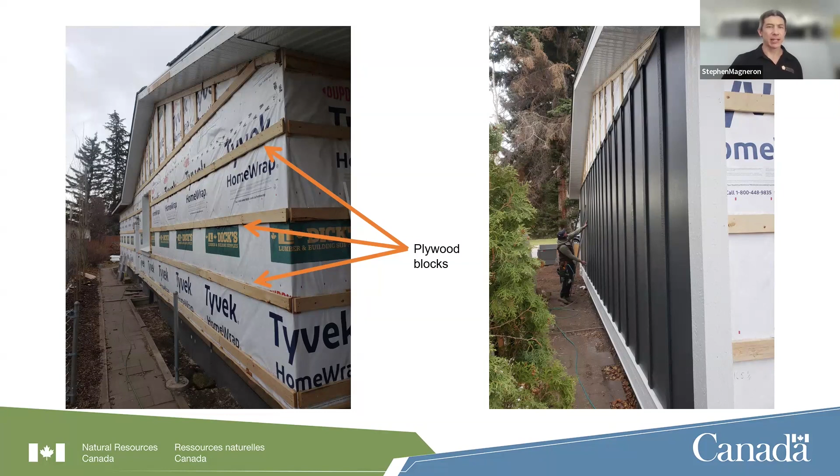The free version allows this condensation risk analysis of an assembly, which is what we're highlighting in this particular analysis. This was done after the completion of this phase of the project, to confirm the assumptions of the performance of the wall from a condensation risk perspective.

For the calculations, to give you some boundary conditions of the amount of water condensation that might be present in this wall, the climate was set at an inside temperature of 21 degrees Celsius and relative humidity of 40%, and outside was minus 25 Celsius with 80% relative humidity. So this model is more of a static model, although it does say that it's over a 90-day period, but it's not as dynamic as a WUFI hydrothermal analysis, if anyone's familiar with that sort of output.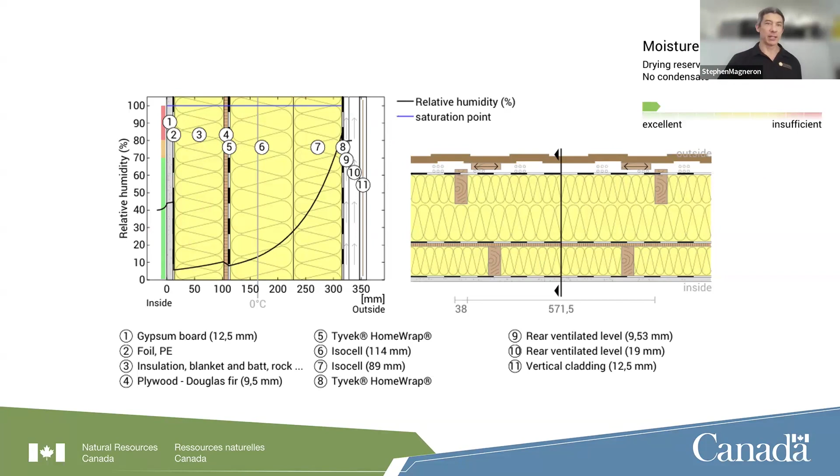They also have this image here where it essentially says that there is no condensate and it is a dry assembly detail from a condensation risk and a mold formation perspective. So a great little tool that is nice to use as part of this analysis.

So I had Kim do some further investigation to see what the impact would be if, let's say, we put sheathing, an OSB or a plywood on the exterior, to see if condensation might occur in that scenario. And sure enough, it does.

Now, I did realize after we had done this that the boundary conditions had changed a little bit. The interior was still 21 degrees at 40% relative humidity, but the outside was changed to a warmer minus 15 Celsius and 65% relative humidity. And at that level, there was condensation on the backside of the OSB. I believe it's OSB or the plywood it is.

But it took 2 days to dry. So a caution, but there's drying potential, perhaps because it's plywood, and there is drying potential with plywood. Now, if we had used minus 25 degrees, I'm going to guess that the drying days would probably increase. There might be more wetting that comes with it, but for all intents and purposes, it's a relatively safe detail. I don't know what they use for air tightness, but that's another big component to that.

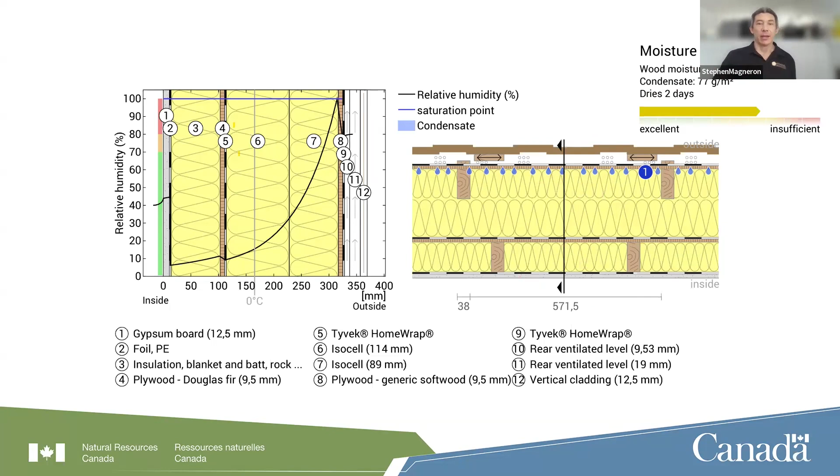I also presented another hypothetical, and now this is in Ottawa, where we have hot, humid summers, just to take this away from Alberta and give it a Canadian perspective. So in Ottawa, if we assume 35 degrees Celsius on the exterior and relative humidity of 70%, with the same interior conditions, perhaps a little bit more humid, with the poly in this location and the interior being cooled, there's actually a wetting potential in the summertime, which is super interesting.

It's not as huge as that solar-driven vapor drive that we see in foundation walls, but the risk is there nonetheless, and it says that there's a high potential for a longer period for it to dry. But this is a bit more of an extreme case where it's 21 degrees inside, which actually makes you wonder if the risk there is because we're focusing more on reducing or cooling the interior as opposed to making it drier.

So in the summertime, perhaps our focus should be on reducing that relative humidity, so dehumidifying rather than cooling. But that's just an aside that I thought was interesting and certainly requires a bit more evaluation in the future.

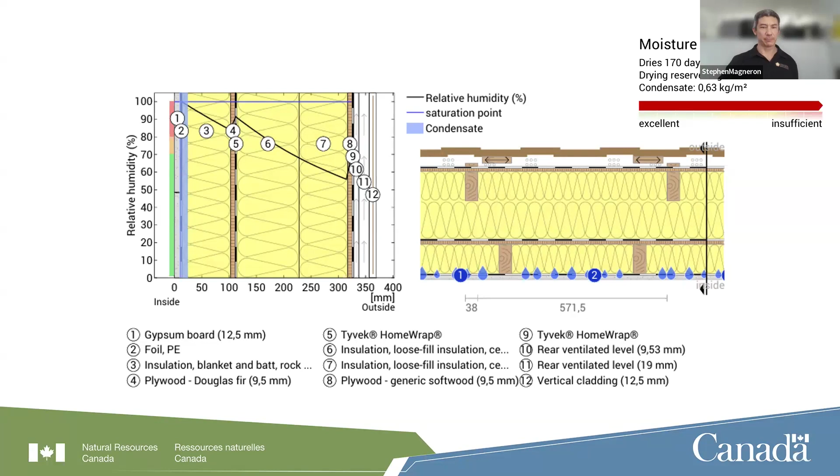Certainly from a cost per square foot, it's only within a couple of dollars of each other, which is interesting because across the country there's not that much of a difference from a cost perspective. In both cases, they both suggested that perhaps the costs would go down with more experience of the same approach on subsequent projects. Perhaps in the third, fourth, fifth iteration, there would be some optimization of costs from that perspective.

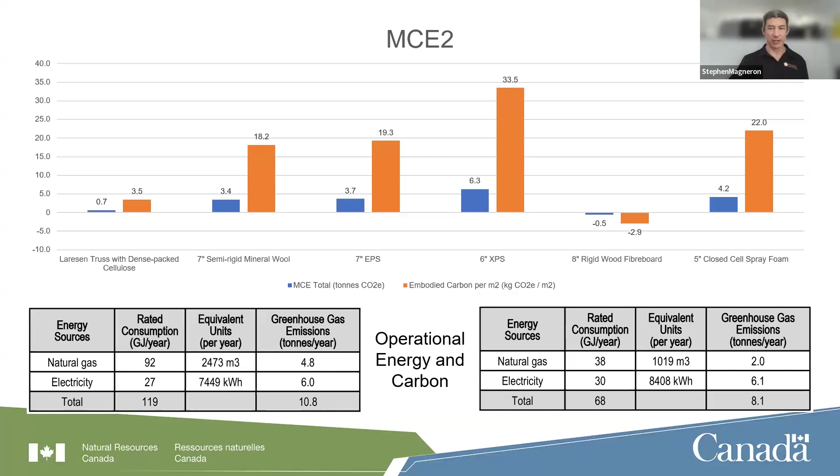So, lessons learned to wrap things up. IDP is the best approach to help set projects up for success. A roadmap can be developed with the end goal in mind, which allows for the development of a phased approach, such that the work done now sets up for the next phase, so you're not doing more costly repairs for subsequent phases because they've already been thought through.

Designing with the Larsen Truss, it's an adaptable method, meaning the essence of the original Larsen Truss allows the project to modify the approach to suit the conditions of each project. It's effective for adding meaningful amounts of exterior insulation with minimal thermal bridging, while effectively improving the air tightness of the building, and presents a great opportunity to implement great water management strategies. All of these elements combine to extend the life of these buildings using readily available off-the-shelf products.

There's synergy with air tightness and updating windows. When we look at the Larsen Truss, exterior retrofits present a great opportunity to reduce air leakage, update the windows or perhaps reinstall them, as we mentioned before, and significantly reduce future risks of moisture-related issues by implementing strategies like flashing and sloped sills and so on.

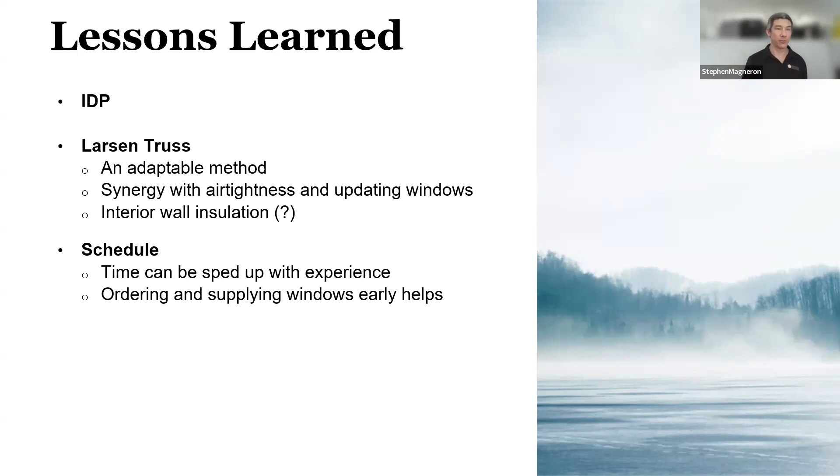Ordering and supplying windows early helps, especially in the sequencing of things. Getting them on site and installed at the appropriate time can help with the schedule a lot, also for the mid-construction air tightness test, so it sets that up for success as well.

From the air barrier, redundancy is good but can be expensive perhaps, or an opportunity to provide some cost savings there.

A complete approach is great to achieving both air tightness and thermal control and reducing heat loss for the entire building. The Chainsaw retrofit was a great success in achieving both results in its completeness, although we'll see what phase 2 will show for the second project.

And test often. When it comes to great air tightness, the more air tightness testing you can do, the better, and that will set the project up for success and make it easier to find and seal the leaks before they get covered up.

So with that, I open the floor for questions.

Good, I've thrown a bunch of questions in there. I know there's one question that's not mine in there. You're gonna have to speak up a little bit, or get closer, come stand in the middle. Let's share their Slido screen again. If you have more questions you want to throw in the Q&A, throw them in now. Like I said, there's one question I didn't ask, so we'll start with that one. What's the Slido code again? Oh, it is.

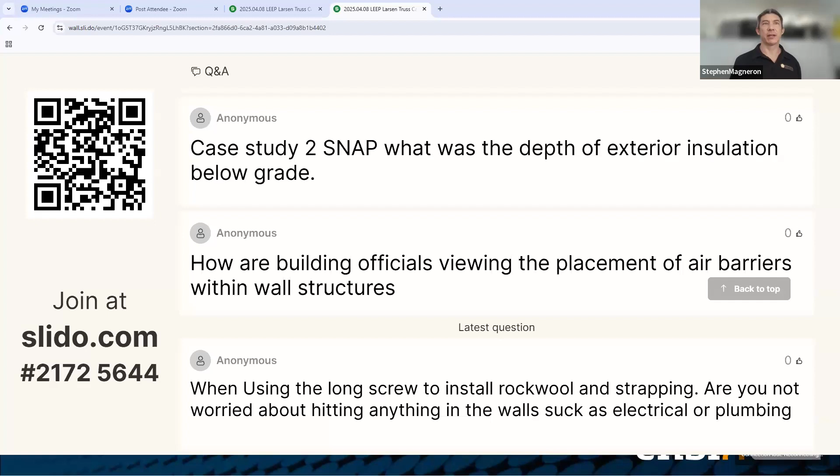For case study number 2, the SNAP project, what depth of exterior insulation was applied below grade? I believe it was two layers of 2-inch foam, but I'll have Steve correct me if I'm wrong. The depth - right, just go 4 feet, 6 feet... Steve says a foot below grade. Oh, the depth, yes sorry - yes, a foot below grade. Okay, thanks Steve, appreciate you being in the crowd.

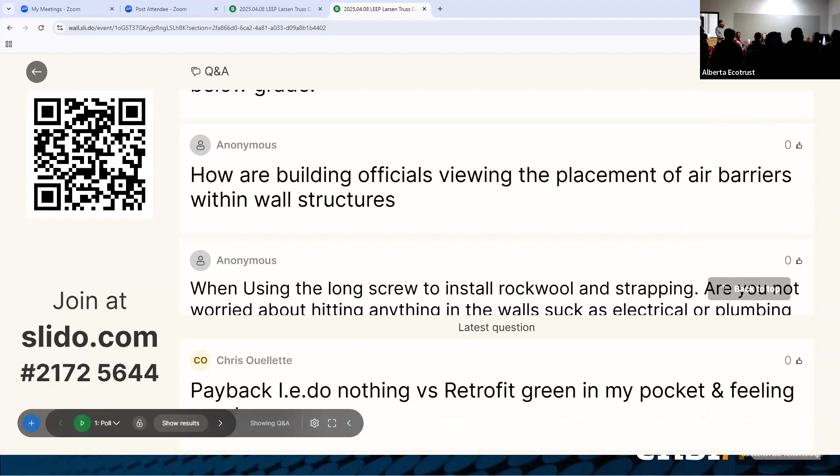How are building officials viewing the placement of air barriers within the wall structure? Ooh, that's a good one. The funny thing with air barriers is that they can be anywhere in an assembly - on the inside, on the outside, or anywhere in between. Where the placement of the primary air barrier becomes an issue is if it's also a vapor control layer. If it has low permeance and is either a vapor barrier or vapor retarder, then it has to be more on the warm side.

But when we look at a Larsen Truss being added to an existing wall, whether it's 2x4 or 2x6, if you just make the Larsen Truss deep enough, just like with the original Larsen Truss, they would put poly there. That's where that 1/3, 2/3 rule came about, and that falls within that. So that poly on the warm third side of the wall assembly thickness ends up being in the perfect location, which helped with the success of a Larsen Truss because it simplified that process.

Third question: when using long screws to install rock wool and strapping, are you not worried about hitting anything in the walls such as electrical or plumbing? That's a great question - you could be.

I'd have to defer to the LEEP wall guide as far as that goes, but you'd only need to go an inch into the stud, so perhaps there might not be anything there. If that's a concern and you can't inspect the existing wall, then perhaps another strategy might be better if you're really concerned about that. But it is one of the risks.

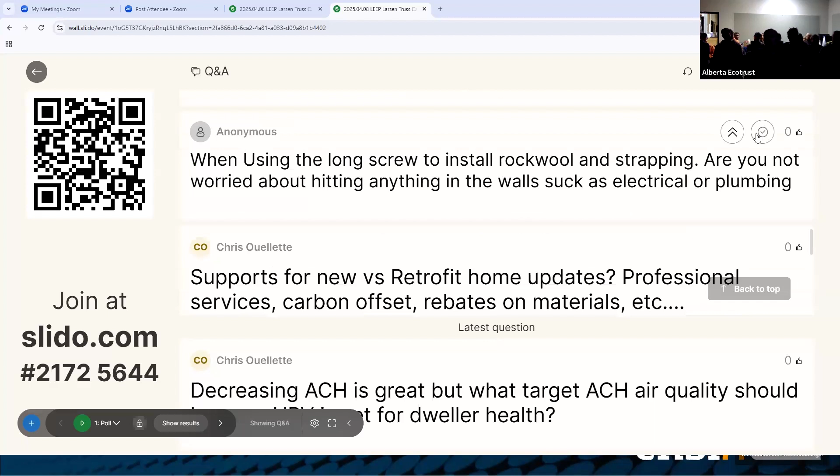I haven't seen anything specific on that, but this is a frequent conversation we see around the influence of the insurance industry over our construction practices, particularly when we talk about resiliency. That can be wildfire resiliency if we're building in at-risk areas, or in Southern Alberta, hail resiliency. I think we saw in both of these case studies fairly durable exterior siding being applied that will have high survivability. And from the insulation side, we talk about passive survivability - how many days does the home remain occupiable in a total power outage or an extreme weather event? So we expect that we will hear about these things from the insurance company. It's a really good question.

And if you're in an area where there are wildfire events every summer, then the amount of smoke that comes into a house that has had a deep energy retrofit or is new construction with super air tightness - the risk of smoke coming into the house and creating fire damage inside, or toxicity levels that won't allow residents to move back in, from an insurance perspective that's huge, because now the occupants are not displaced for a longer period of time. That might be an insurance cost, and they can move in much faster.

So for Larsen Truss, would using rock wool batts be a safer option than dense packed cellulose? And I'm assuming by safer, we're saying more vapor permeable. So would it be a more vapor permeable and, I guess, longer-term durability option?

From a vapor permeability perspective, they're about the same. Mineral wool batts are hydrophobic, meaning that if moisture gets back there, it drains and then it's back to normal. Interestingly, with cellulose, it's a hygric buffer, meaning that it can store moisture and then redistribute it within the assembly and then allow it to dry. So as long as the vapor control layers are chosen so that there's drying potential in either one direction or the other, or in both directions, then both perform in a very similar way from that perspective.

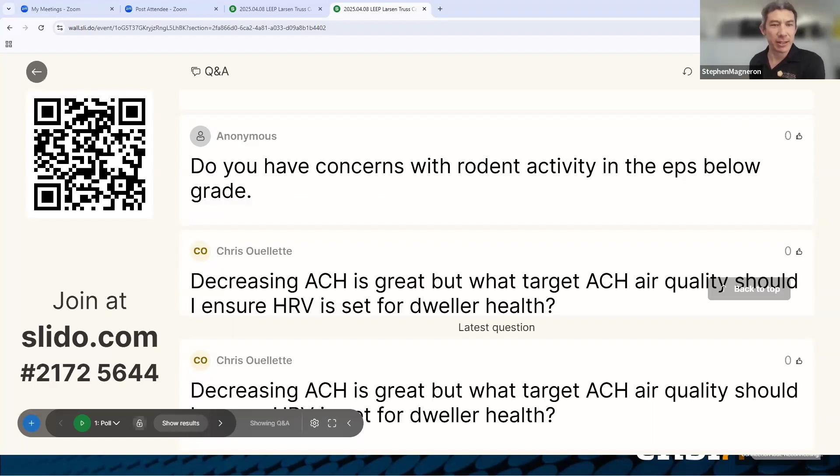Personally, no. Steve, do you have any concerns about rodent activity in this particular project and the application? I haven't seen it yet. It's used often below grade, and so I haven't heard of too much happening with respect to rodents. Perhaps termites in the deep south, although it seems like termite activity seems to be migrating north. But if that's a concern in your particular location, that could be a good indicator to make the appropriate choice of materials for the below grade application.

So decreasing ACH is great, but what target ACH air quality should I ensure the HRV is set? So, what are your comments about how do we mechanically ventilate the house when we're building super airtight homes, and how are we designing for that?

Both of these projects, with their target of great air tightness, also included an ERV or HRV to provide mechanical ventilation with heat recovery, and perhaps moisture recovery with the ERV. Any project considering a deep energy retrofit or improving air tightness should also be adding a ventilation system with heat recovery as a standard. That's a non-starter, it's one of the consequences of making the thermal enclosure that much better, is that there's additional cost of adding this mechanical system, but that's the best way. You want to build it tight but ventilate it right, with a balanced ventilation system with heat recovery.

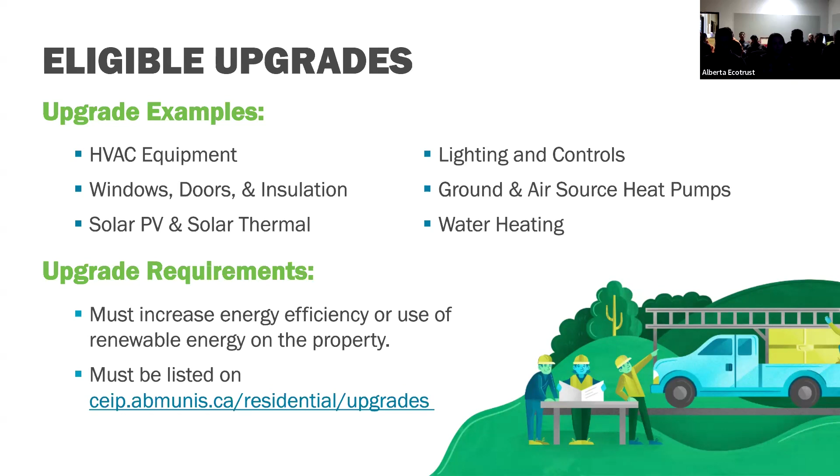So step 4, as I was alluding to, is the project application. This is where you've basically provided the participant with a quote and spec sheets for the equipment on your quote. The participant then accumulates all of the quotes they got for their different upgrades - they might have windows, doors, and solar, let's say - and they'll have all of those on quotes that get submitted to us, and we do a quick review of that. By quick, I'm going to tell you now, it's about a month. We're really busy, so it's about a month.

If you give a quote, one tip we ask is to extend the quote expiry if possible. We recognize some things you can't give more than 30 days for, that's fine, but we are probably going to be calling you asking if we can extend this to 60 or 90 days if possible. So it helps if you can have that on the quote, that it's good for 90 days. That's step 4. One quick thing too - if you are operating in the city of Airdrie, you have to have a business license, so make sure you do that as well.

Step 5 is application approval and installation authorization notice, also affectionately known as the IAN stage. This is when we've approved it, the municipality's approved the application, and they've basically secured and saved that funding, put it aside for the project. So that's your money basically guaranteed as soon as upgrade completion has happened and everything's been approved. So you guys are going to be getting paid - it's not up to the participant at this stage to provide that money, it's up to us, and we've got it set aside by the municipality.

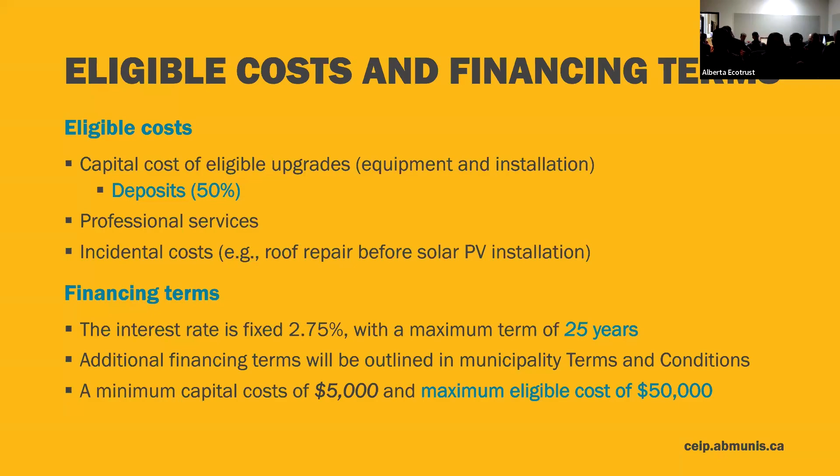So the city of Airdrie has also got - just to be clear, are you revisiting the interest rates that the customer has at 4 years, or is that 2.75% guaranteed for the 25-year term? It's for 25 years, but in 4 years the rate might be adjusted for new participants entering a new contract, at the new price.

So there are some incentives available, a rebate of $600 for all CEIP completed projects. Does this cover the cost of evaluations, as an energy advisor? It depends on the cost, but generally a pre and post evaluation together is about $750. So this won't quite cover the full cost, but it's geared towards the overall project. It's not like a check that goes to a contractor or participant, it just reduces the overall financing on the tax roll.

An additional $2,500 is available for completed CEIP projects that have financed more than $15,000. This is geared towards deeper energy retrofits, where your clients benefit. They have to install 3 or more upgrades, at least 2 of which are energy efficiency, renewable energy, or fuel switching. I thought this was so innovative, did you come up with that one, Joette? It's great, so if they're switching from natural gas to fully electric, that would be eligible for the rebate.

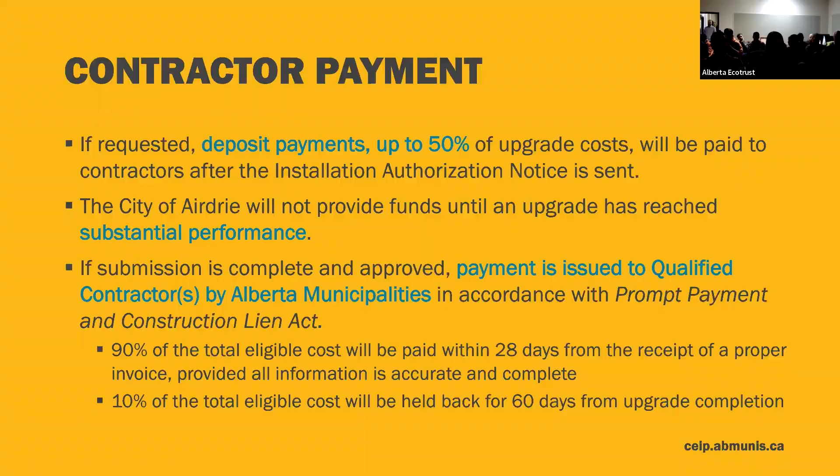The last stage here is the post-project home evaluation. This basically bookends the project. You've already been paid, so you're off onto your next projects at this point. But the EnerGuide evaluation shows the difference between pre-upgrade and post-upgrade, and that's used for reporting purposes.

Then the clean energy improvement tax is added to the tax roll and repayment begins. At this point, the participant will have a pending tax item, and it'll come on whenever you do your taxes. Is it in April? Do you guys do yours... it's in June, okay. So once a year, it'll be updated to have that new line item.

So for you guys to become involved with CEIP, if you're not already—I know a few of you are, so thanks for participating—all you have to do is submit an application. It takes about 5 minutes on our website, myceip.ca or ceip.abmunis.ca. We approve the application; it's very quick.

There's an onboarding process where you log into the portal and go through some modules that reiterate everything we just went through. It's really great. Whoever's going to be your primary contact at your company does the module training so they understand the program and what is required on invoices and quotes. This helps streamline things. If your administrator moves on to another job and you get a new one, have them log on and do the modules too—this helps as well.